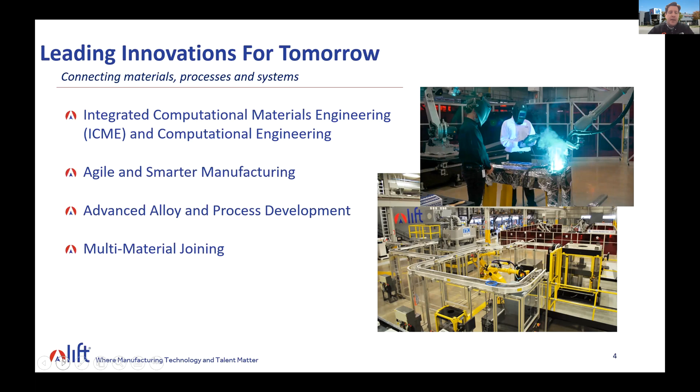We want to make sure that we can get these new technologies, new innovations in the hands of the warfighter, in the hands of industry to commercialize as quickly as possible. So we're glad to have Solvus Global here today talking about that transition.

You see a little bit more in depth about those pillars of technology here. I won't quiz you on these, but if you have questions, please don't hesitate to reach out to us directly. We'd be happy to talk to you and connect you to our technology team to see how we might help your organization move forward with any of these technologies.

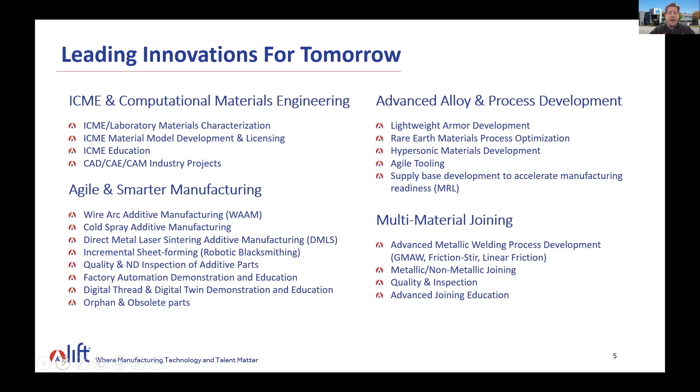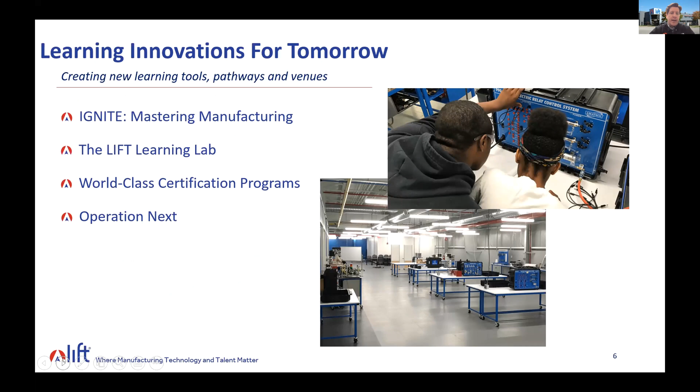A little bit on the talent side of the equation. Again, still here about innovation, but now we're talking about new learning tools, new pathways, new venues, and we really cover the students' continuum through their education pathway, starting with our Ignite Mastering Manufacturing curriculum.

This is a high school curriculum, a foundational curriculum for high school students, introducing them to advanced manufacturing and driving them towards possibly becoming the next generation of multi-skilled technicians. We run that curriculum out of our LIFT Learning Lab that is in our Detroit facility.

It's not solely at the Learning Lab, though. It is available in 10 states around the country. About 3,500 students are currently participating in our Ignite curriculum, but we tested it out and ran it first in our LIFT Learning Lab.

You see the Learning Lab there is really made of 7 different labs. Along with the high school curriculum at their Learning Lab, we also offer certification courses and certification opportunities for more mature adult learners.

Those are running and are LIFT certified programs that we run through LIFT. And then we also have our Operation Next program, which offers the same four majors, if you will, but those are geared towards our active duty service members and members of the National Guard and Reserve. So we are proud to help those folks transition into their next career, their civilian career, help them earn a certification while they're on active duty or serving the Guard and Reserve, free of charge to them.

That is available in Fort Campbell, Kentucky. It is available to the National Guard and Reserve in Michigan, Wisconsin, Florida, New York, Alabama. It's also available to the Hampton Roads region of Virginia. So we're very proud of that program.

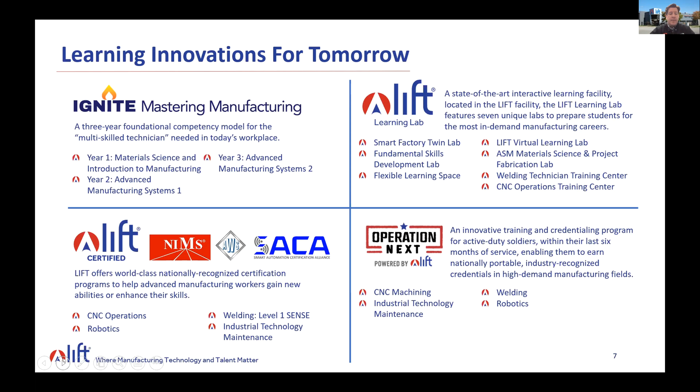I mentioned we are a nonprofit public-private partnership. We're also a membership-based organization. So I want to thank Solvus Global and their team for becoming and staying with LIFT as members. But what do you earn as becoming a LIFT member? Well, you earn all the things you see on the screen here.

We're a trusted advisor, not selling a particular product or service. We want to guide people to make that transition towards smarter manufacturing as quickly and seamlessly as we can. We're a technology accelerator, taking those technologies across the valley of death into commercialization, and folks like Solvus help us do that. We're a technology showcase, showing the art of the possible, and Sandbox, our technology team working out of our Detroit facility, showcasing the future and what is possible while sandboxing some of those technologies as well.

We're a connector and a convener, which is why everyone's here today. So thank you very much for joining us, trying to bring the best and brightest minds together. We're a talent developer, introducing high school students to advanced manufacturing, helping adult learners earn their certifications in advanced manufacturing. We want to make sure that pipeline is healthy and robust.

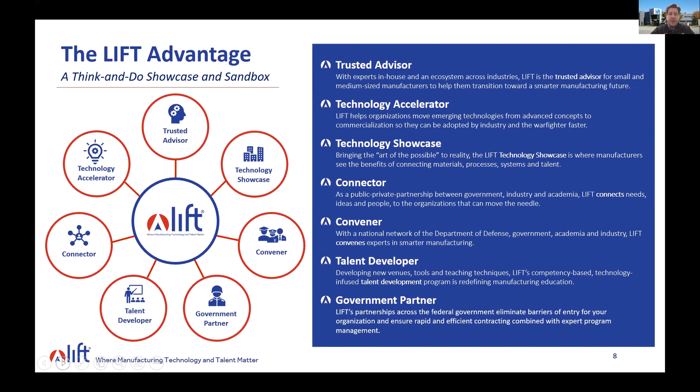And finally, we are a government partner. I mentioned we are a Department of Defense Manufacturing Innovation Institute. It is a challenge for small companies, particularly, to begin to work with the Department of Defense or the federal government. So we are happy to be that conduit and help folks start to work with the government and take those innovations to the warfighter and across to industry.

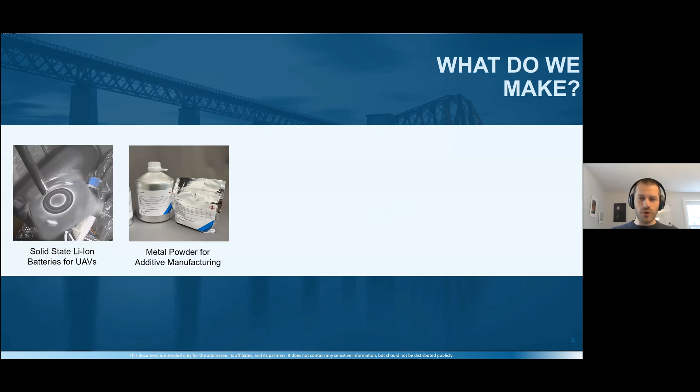So what is it that we do? What do we make? We make batteries, solid state batteries for lithium ion applications, for things like UAVs and UVs. We make metal powders and metal matrix composite powders for additive manufacturing, particularly cold spray and cold spray additive manufacturing.

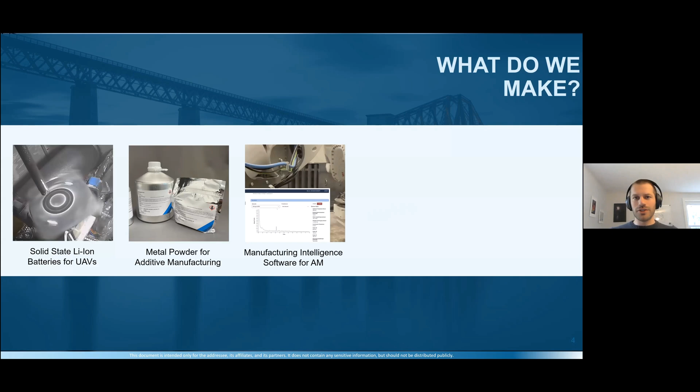We build manufacturing intelligence software. These are tools that interface with all kinds of machines and sensors and bring all that data into one data warehouse, letting you store and share that data across collaborative teams. We do a lot of work in large format casting and forging replacements using AM and related processes to robustify our supply chains. And lastly, one of our other big focus areas is developing software tools to enhance recycling profitability.

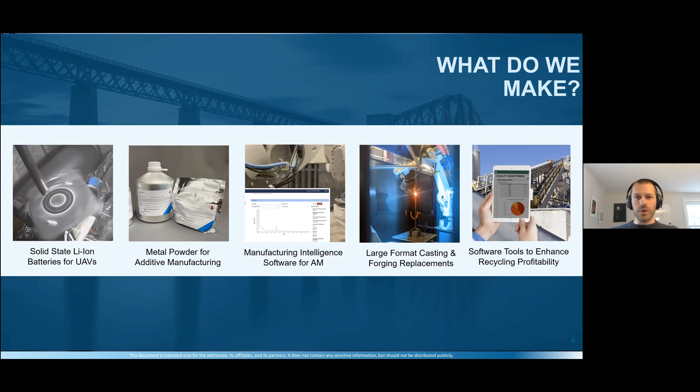I'll talk about each of these briefly in turn. We execute on the work through those different technology areas across a couple of different brands. You can see the different brands here. I won't dive too much into detail, but Powders on Demand is obviously focused on AM powders, and our big business unit is focused on large format AM, particularly metal.

So again, we've got five technology areas across these different brands, and that's what we do to help deploy these solutions out into industry. I'll touch on some technology pieces here that'll be fun to talk about, and we can dive deeper if there's any specific questions anybody has.

We are located in central Massachusetts. We have three different facilities: Worcester, Leominster, and a shared space with VRC Metal Systems down in Webster, Massachusetts. So we've got quite a bit of production space. We just moved into this space last June, and it's about 70% programmed out already. We're really excited to be scaling up a number of our operations.

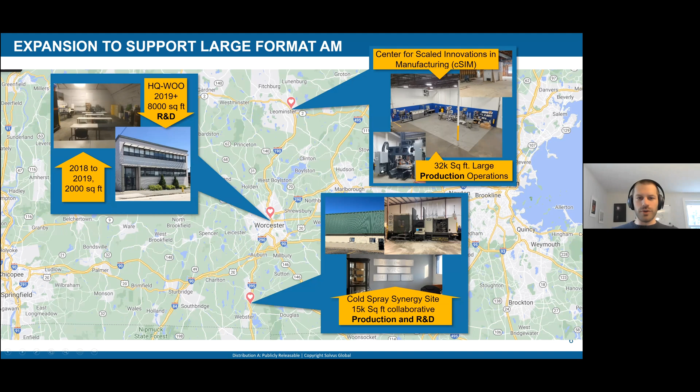We're a relatively young company, relatively small, but growing pretty quickly, and we're excited to share some of what we're doing as part of these scaled up operations. So I want to start by talking about powders for cold spray, additive manufacturing, and beyond.

A key part of what we do is really focus on designing materials that optimally perform in a given process. A great example is our SAAM aluminum 6061. You can take an aluminum 6061 powder off the shelf anywhere and run it through a cold spray process. If you're not familiar with cold spray, metal powders are injected into a high pressure, high temperature gas stream and shot through a supersonic rocket nozzle. They travel really fast, hit onto a surface, deform, and stick.

In an as-received condition, you're going to have a really brittle product. It might be fully dense, it might have great corrosion properties, but it's not going to have great mechanical structural properties. So what we do is engineer that powder — we change things like the surface, the morphology, the microstructure, and optimize it for a specific process, not even just the process in general.

Cold spray encompasses a lot of different technologies, but specific to the process performance that you can get with something like helium versus nitrogen, high pressure cold spray versus low pressure cold spray, we tackle all of those different areas, and we make sure that the powders that we produce can directly perform in the process that you're going to use.

So the example here for aluminum 6061, you get a brittle product in the as received condition. When you use our product, which is a modified 6061, you're going to get near structural, near wrought type properties. So the idea here is that across all the materials that we offer, you can hit these types of performance metrics in your as-built state, or with minimal post-processing. Essentially, we optimize our materials so that they work in the best way possible in your manufacturing process, and we guarantee that type of quality and control.

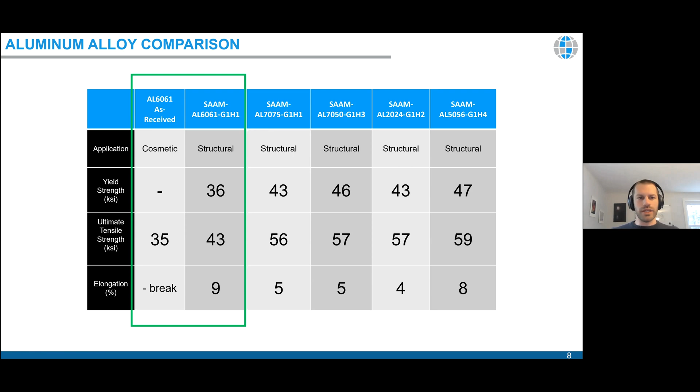Another key piece of this is our ability to really quickly innovate and evaluate different materials. We understand at a physics-based level what's going on in the material systems during these types of processes, whether it's laser-based or kinetic-based, doesn't really matter. So we develop and deploy a number of different both evaluation and quality assurance tools to monitor these materials.

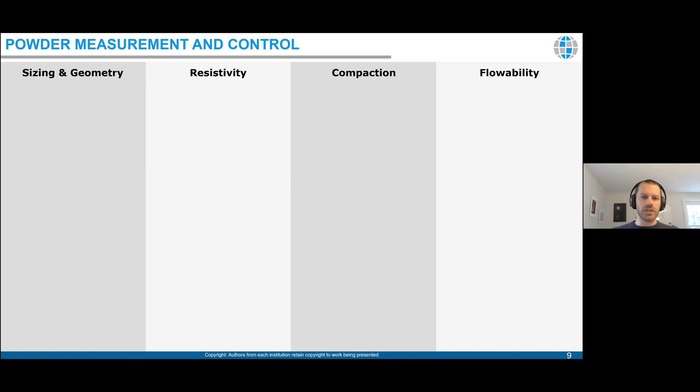The reason that matters is that for a long time, we haven't thought enough about what really goes into a powder, what really makes it work and function. So we look at things like size and geometry. We have a number of different techniques, a number of different attributes that we monitor here, from morphology, size, surface area, and all of that kind of fun stuff.

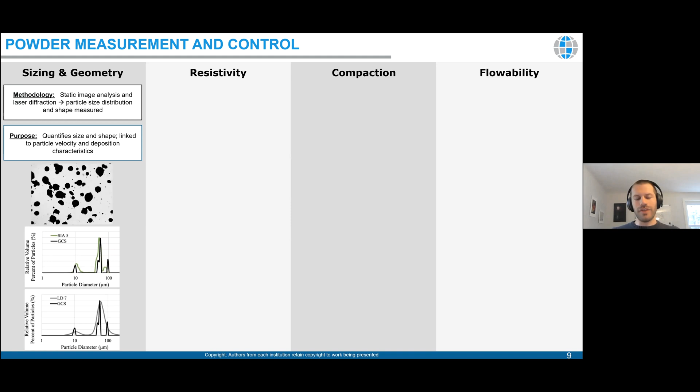Electrical resistivity of the material. This tells you a lot about the surface characteristics, microstructural characteristics, as well as some information about your size and sliding characteristics of the powder material.

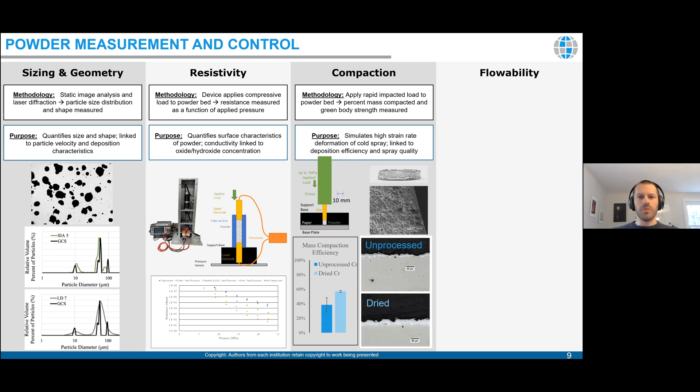We look at something called compaction. This is a high impact strain evaluation designed to evaluate the differences between the mechanical aspects of different materials. So you can see here an example of an unprocessed and a dried chromium powder. You get significant improved performance in the dried material, and we're able to evaluate that through our impact scenarios.

And then lastly here, flowability. There's a number of different flowability techniques that are out there in industry, whether you've got Carney, you've got Hall, you've got flow block, rotary drums, lots of different techniques. The important part is that you understand in your given process, how is that powder actually moving, how is it actually flowing? So we take great pride in evaluating the flow characteristics of the powder material related to the process.

So that gives you an evaluation in the kind of laboratory - how is this material going to perform in the actual deposition process, whatever that process may be. So we've deployed a number of these across quality assurance, as well as material evaluation, screening, and development. So again, we can get to the ultimate goal of providing the right materials for a given process so that you get the performance targets that you need right out of the gate.

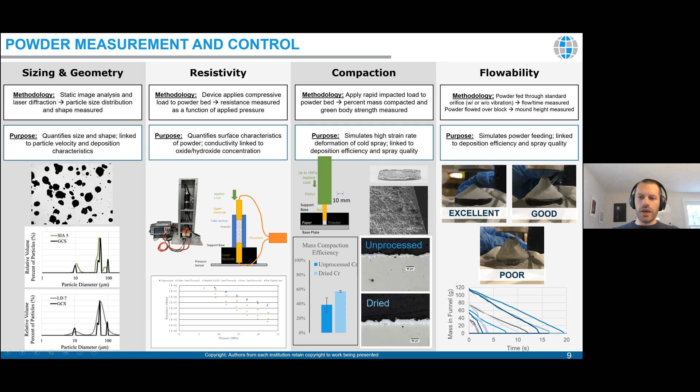We have a number of different capabilities in the background for doing that. Everything from sizing operations to surface modification operations, microstructural, mechanical modifications. It ranges the gambit. And really, it's a number of different capabilities that we deploy, as well as we deploy through our partners. So if we don't have the capability in-house, we have folks who can get it. If we don't have the material off the shelf, we have partners that we can work with to get you that material. So we can essentially be your one-stop shop for any process-specific powder material that you might be looking for.

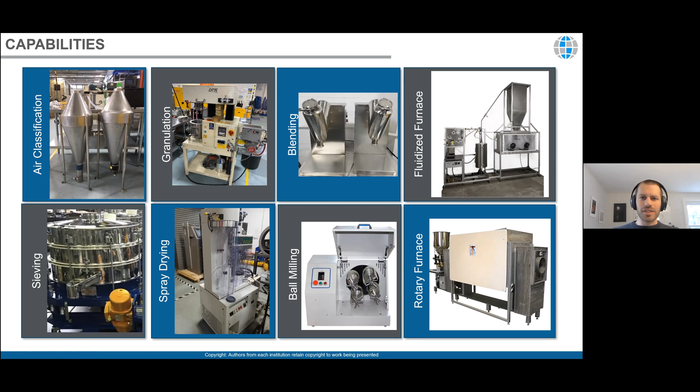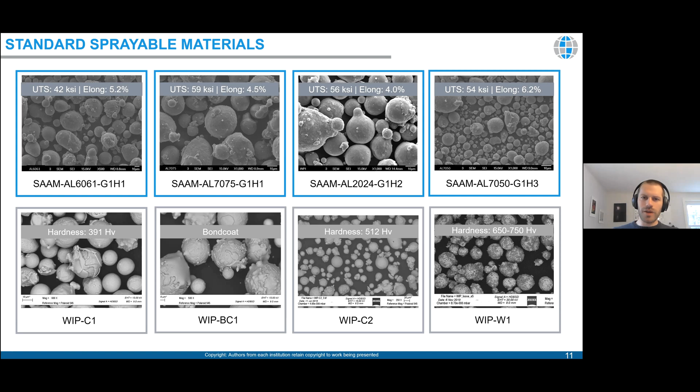We've got a few others that are coming down the pipeline here. So you've got things like silver, we've got a high nickel superalloy-based material, titanium, as well as some newer hard-facing materials, this WIP W2 designed to be sprayed in nitrogen applications. We've got some copper-coated tungsten, very good for electronics and kind of radiation protection. Some unique stainless steels that are coming out, designed for really high deposition efficiency in a nitrogen spray environment.

If you're not familiar with nitrogen versus helium spray, nitrogen is great for low-cost applications, while helium is great for high-cost applications. So you can leverage those depending on your target performance requirements.

We're working on some nitrogen sprayable aluminum products, as well as some different metal matrix composite materials for really high corrosion resistant applications. There's a bunch more coming down the pipeline, including refractory-based materials, some other alternative functional materials, and additional corrosion resistant materials.

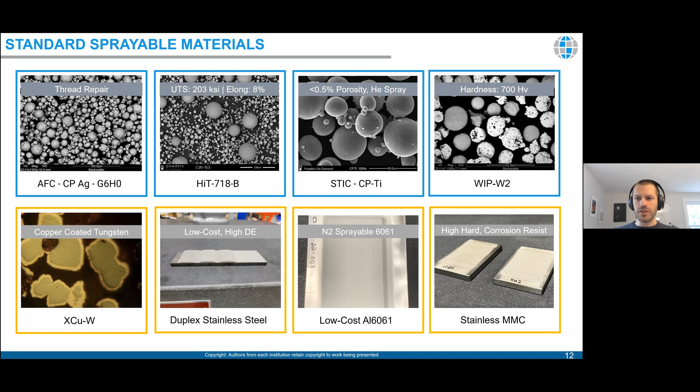So if there's a material you're looking for in your specific application, let us know. If we don't have it, we probably have it in our development queue. If it's not in our development queue and it's a high enough need, we'll roll it out for you. We're here to ultimately serve our customers and serve the need base of the user community here.

When we talk about the powder materials, in particular for cold spray additive type applications, the key here is that we're property first. We're not just selling a product for the sake of selling it. We're really focused on making sure that the materials will meet your need, will meet the demands of your application. And so we put all that front and center.

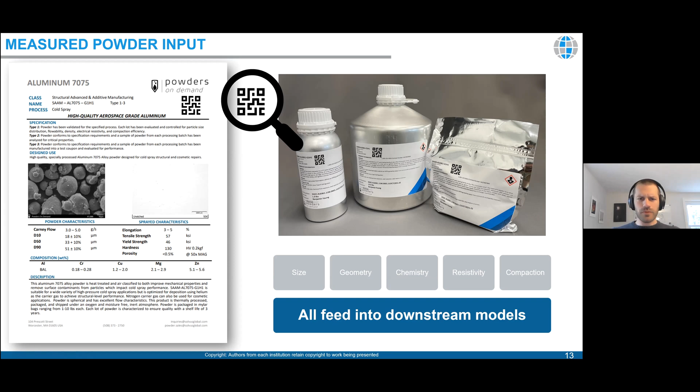We put it on a little QR code here so you can get access to all the materials, all of the information that you need to both qualify and assure your material, as well as select the right material for your specific application.

When we look at this over a number of years, we design our materials to be fully inertly packaged, to be able to sit on the shelf for many, many years, and to be able to be used right out of that package.

The packaging has actually been modified since we first came out with some of these designs, but we've got a great example here of over the course of 4 years, an aluminum 6061 that we had processed that really, after that period of time, hasn't seen any degradation in material performance.

That's because of the care that we take in processing the material, removing moisture, removing oxygen, packaging the material, so it can sit there and be ready to go when you need it, whether it's point of need type manufacturing out in the field, or in the shop when you just haven't gotten to use that material in a while.

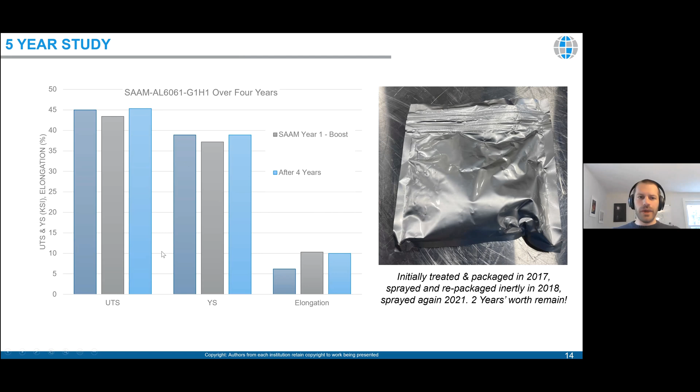We offer a variety of different packaging solutions. Again, it depends on the product and what you're looking for, but everything from those bags you saw a second ago to kind of forward operating type secure material transportation. It could be a Pelican case, or some other secure vessel, but powder-based materials that are ruggedized so they can go into a variety of different applications forward and beyond.

So that's everything I'll talk about today on powders. Again, I'm not diving into applications there. We've got material properties. If you want to talk applications, happy to jump in there offline.

I want to switch gears a little bit to some of the data management activities. For this, we'll talk about really a single product focus here around the Apex platform that I talked about a moment ago.

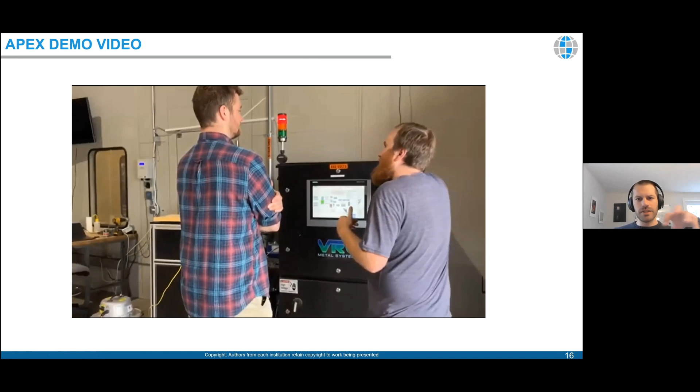This is really built out. It's out in testing in a number of different sites right now, in collaboration with the US Army, US Navy, and VRC Metal Systems.

What this is, basically, is a tool that pulls together all kinds of different data streams from the manufacturing cell. So this could be a cold spray system, this could be a wire arc additive manufacturing system, or it could be any other manufacturing cell.

It manages all of your different consumables, all of your different wearing components, stores and tracks those, and actually adds some intelligence in the background. So if you're using a worn out component, or a component that's maybe incompatible with something else, the system will flag it and recognize it for you.

It offers full organizational management, so we can get in there and work with a number of different organizations distributed across a bunch of different geographies. This can be cloud-based or local, just depending on your specific security and data sharing needs. You can get in here and really customize this depending on your specific application.

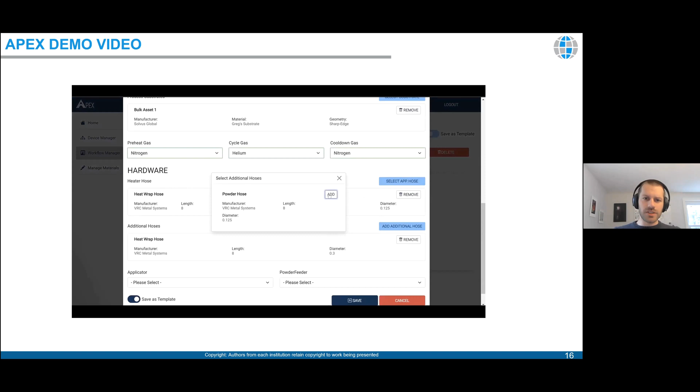Again, everything here is really teed up for a cold spray specific type application, but there's a wide range of systems and sensors that we can interface with. All of these allow for streamlined, seamless data management, data sharing, and data storage.

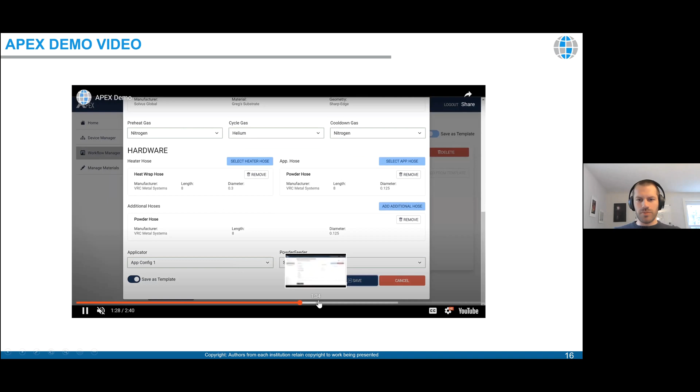So I can skip you through here to the process for a second, just to give you a sense of it. There's some intelligence added in here in the background. Basically, we've taken all of the processing conditions that we're operating at.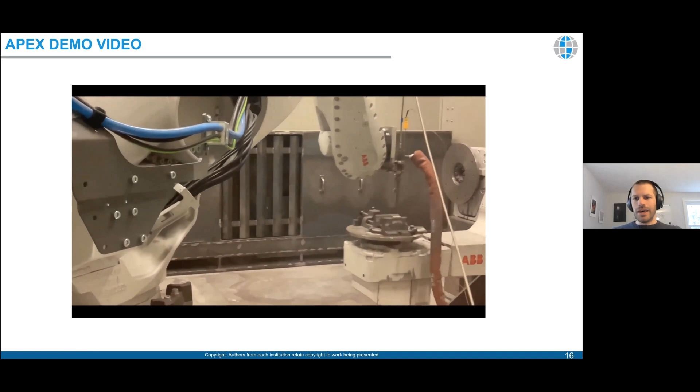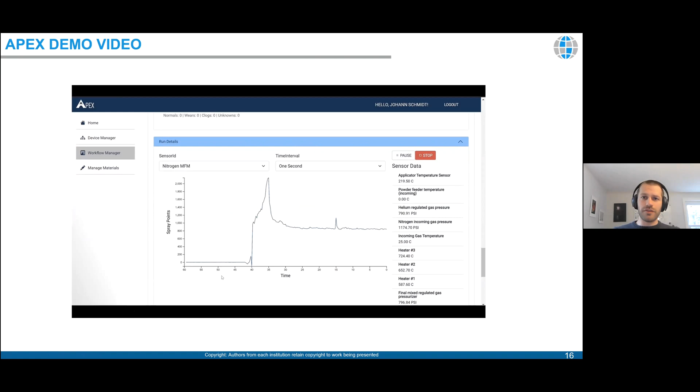There's actually a model built in here to recommend whether or not the materials you're using are compatible with one another. And you can see a really simple operation with the process monitoring, flagging through different sensors, whether they're on board with a PLC or off board in a separate profilometry or thermal camera based system. You can see the types of data we're able to capture, and again, all of that is stored in the background for whatever purpose you want, sharing or otherwise.

The idea here is that it interfaces with a wide range of different material systems and capabilities. So the kind of back engine of this, in terms of some of the models and intelligence we can insert in here, is pretty neat.

In this case, we have a nozzle clogging, fouling, or wearing recommendation engine. If you're not familiar with that specific issue in cold spray, sometimes certain materials flowing through that nozzle I described earlier aren't compatible with one another. Maybe it's a hard material through a soft nozzle, so you start to wear away at that nozzle. Maybe it's a really sticky material through a hard carbide-based nozzle that tends to clog or foul.

So essentially what we've done is gone through and broken out all of the different material components of a nozzle and of a powder, looked at a bunch of different experimental data, and put together this machine learning based recommendation engine that learns as you generate more data inside of your processing map.

It basically looks at all the different conditions - your temperature, your pressure, the materials you're using, the specific nozzle you're using, not just the type but the actual nozzle identifier - and evaluates whether or not those materials are compatible. It recommends, hey, maybe you should change your nozzle, maybe it's going to wear out over the course of this 2-3 hour spray operation because that nozzle's been heavily used, and makes those recommendations right in the platform.

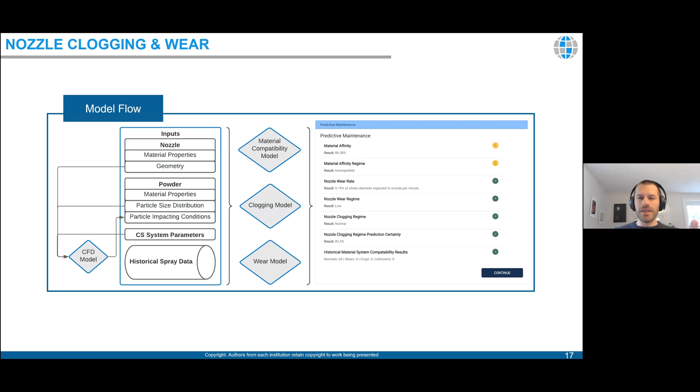So in this case, you can see some of the types of powder properties brought into play, some of the specific nozzle history, operating conditions, again across this example of VRC Gen 3, and then the outcome. This is basically a map of a bunch of different materials that have been sprayed in combination, and the system is looking at this process map and saying, okay, where does this new data point fall that I'm going to be spraying?

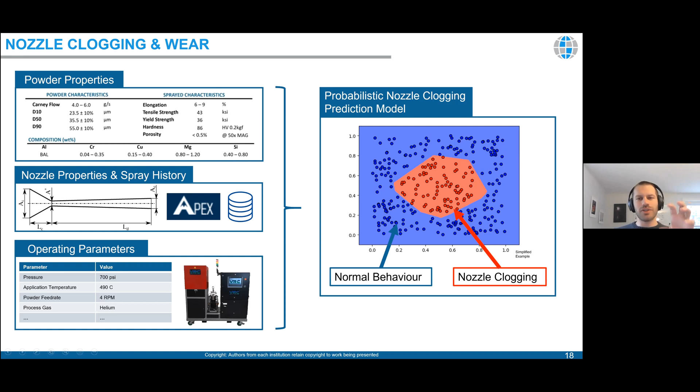Is it going to be in this normal operation window, the blue space, or is it going to be more in that red zone where we have concerns over clogging occurring? So that's where you get a recommendation engine we've built out specific to the cold spray process here. There's some other activities we've done.

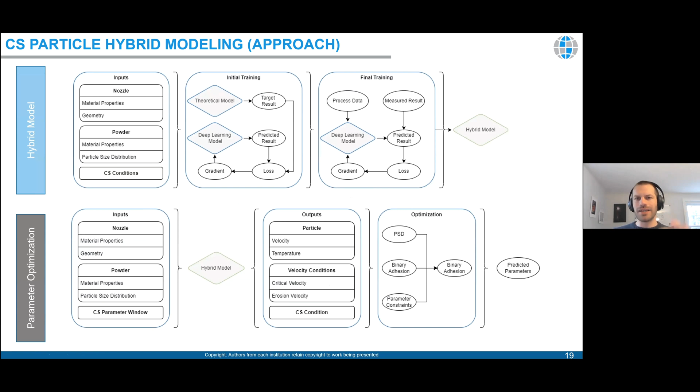I'll skip through this fairly quickly for the sake of time, but basically looking at hybridizing predictive models for cold spray, specifically looking at velocity calculations. This is more of a research and development effort, but if anybody's interested in collaborating in this type of space, we do quite a bit of taking physics-based models, hybridizing them, and putting them into an environment where you can use them as tools, as resources for quick process evaluation, optimization, things like that.

So this is just an example where you could take a fairly standard physics-based model. You could program it out in MATLAB or your other programming language of choice, and running that operation might take you a few hundred seconds. You can really get in and tune that up, and it's still going to take on the order of 10 to 15 seconds to run an operation.

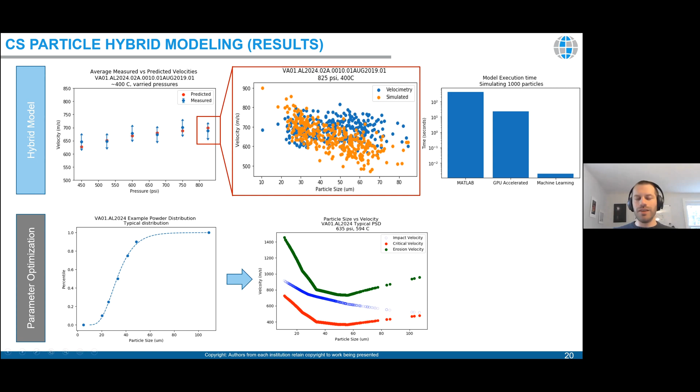When you hybridize it the way that we do, using different neural network configurations, we can get that calculation time down into fractions of seconds. And that allows you to run iterative optimization models. It really kind of takes the best of both worlds - your data-based processing combines with physics-based processing and lets you do high throughput computation with relatively minimal effort. So if anybody wants to chat about that, happy to dive in deeper there.

I did want to dive into some of the large format additive manufacturing operations we have going on. The basic premise of this, I'll borrow from Dr. Aaron Wiest - I think he's transitioned roles since his shipbuilding industrial base task force days, but he's still working in this space. He really identified a major need in the Navy supply chain specifically, but this applies to all supply chains in the US for casting and forging gaps, long lead times, materials that aren't available, and overseas manufacturing that's just not available today with all the supply chain challenges across the globe.

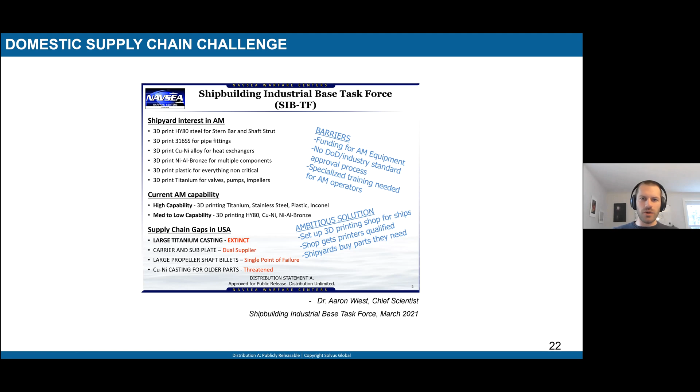So we took this challenge to heart and said, okay, what can we do to help step into this space? Our primary focus is really on metal-based large format 3D printing, where we're not looking at high resolution builds - we're talking about large parts, many feet by many feet on a side. And we're focused really on material performance first and foremost.

A great example, obviously near and dear to the Navy's heart, is titanium. We've developed a wire arc additive manufacturing procedure, working to qualify with NAVSEA under their new ArcDED Tech Pub, to produce WAAM titanium parts for the Navy. The reason for this is that these are the types of parts that have very low availability out there in the industry today - supply chain challenges, either very, very long lead times or no quotes.

With the wire arc additive process, we've designed and built our own inert enclosures. We've qualified these materials - they meet and exceed all casting requirements. You can see down here at the right, very consistent build operations. And what that allows us to do is basically have an alternative to cast titanium parts.

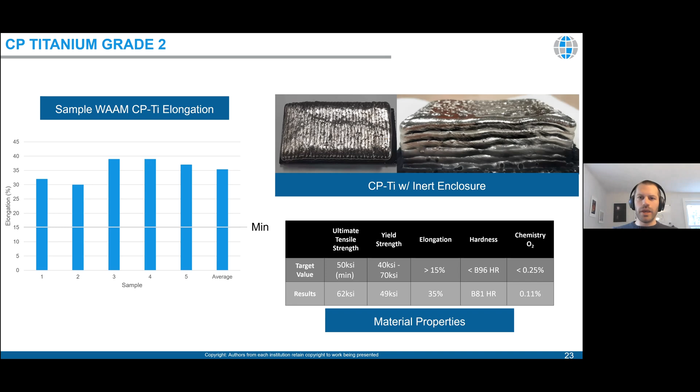These are non-structural - so we're talking cast here - but they're able to serve as a supply chain remediation, in particular for these types of components that are no longer available in the supply chain, or we've got ships or aircraft sitting in dry dock or on the ground, not in operation, because they don't have parts. Additive manufacturing can come in here and remediate that challenge. I'm not talking about any specific parts here because it's a public forum, but you get the idea in terms of the material properties and performance we can get out of this.

Looking at a few other technology areas we focus on: cold spray additive manufacturing is a big one for us. We talked about some of our aluminum 6061, some of our nickel-based superalloys that we've developed. We've also got a number of different copper and refractory-based materials coming into play now for additive manufacturing purposes, as well as combination approaches - AM with cold spray, combined with surface modification based on maybe a wear-resistant material. All of that's kind of within the wheelhouse these days.

Across the wire arc additives, we talked about titanium. We also have a huge focus on high-strength steels and 4000 series replacements - we're getting well in the neighborhood of target applications for replacing things like your 4340, 4140 steels using, again, a wire arc process. And then a big lift in the nickel superalloys on the wire arc additive side of things.

These are used in a number of different applications, from obviously turbine applications to activities with PEO Soldier that we're developing some unique solutions for. These are, again, high strength materials, designed property first, focused on performance-based applications.

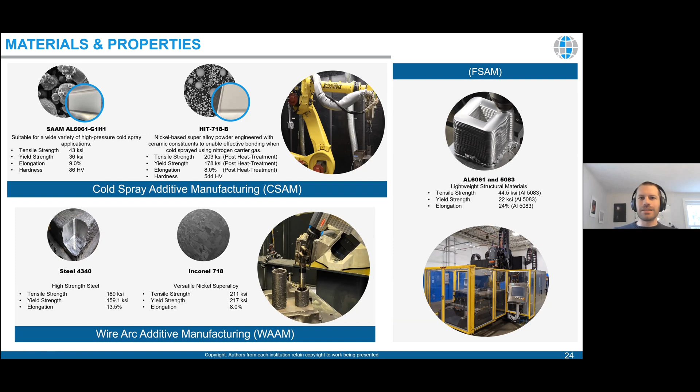And then lastly, over here on the right, a relatively new area for us compared to the others - this is friction stir additive manufacturing. We primarily focus on 6000, 5000, 7000 series aluminum alloys. These are a lot of development activities - we're looking at the same kind of idea, but now focused more on forging replacements, so getting wrought-like properties right out of the gate with friction stir additive. I'll show you a video of that here in a second, but this just gives you an idea of some of the different materials and capabilities we're looking at as solutions for this large format casting and forging replacement in the domestic supply chain here.

A few of the different systems that we have coming in, or are already coming in: a number of different wire arc additive cells, and a number of different cold spray additive cells, both large format and more traditional.

We've got a fairly large wire arc additive machining and heat treating line coming in. We're pretty excited about this. It's going to be a fully integrated line for going from a wire arc additive cell, doing your heat treatment, putting it in your machining center to run your finished machining operations, and get it right back out the door. This is actually in collaboration with the state of Massachusetts through the Mass Tech Collaborative Program, and it will be landing on our floor around October of this year.

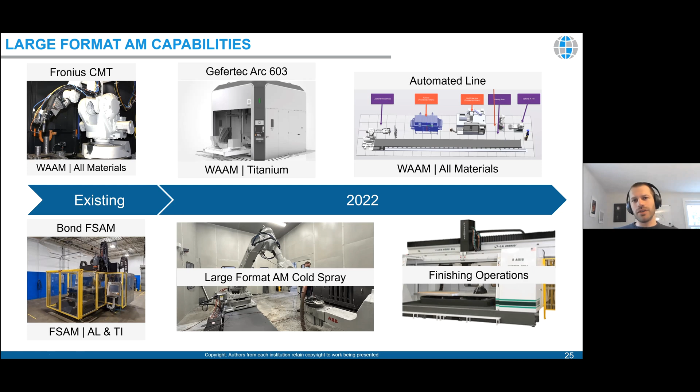So this is all getting to the idea that we'll be a one-stop shop for building your casting and forging replacement parts using additive manufacturing. Again, we're not particular to any one process. What we look at is what's the best process to hit your specific performance requirements, as well as your cost and lead time requirements. All of those things are what drive our selection. It doesn't matter whether you want to use WAAM, friction stir, or cold spray — what's best for your application is what we'll help you get to. The idea is that we can do all of this in-house, which minimizes fuel consumption and transportation, eliminates a lot of the headache in your lead times, and eliminates some of the risk you have when working with a lot of different vendors. We're here as kind of one stop for all of your different needs in the AM production cycle.

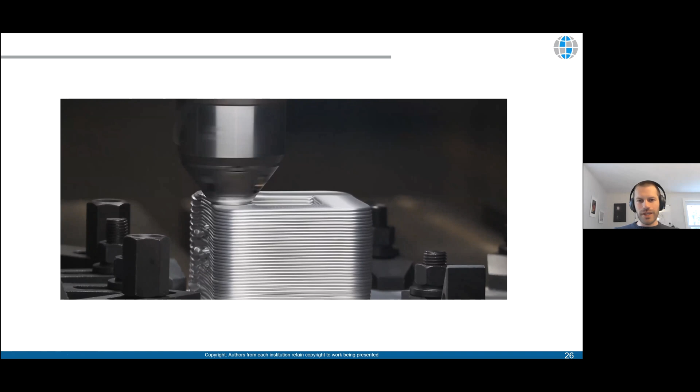So just to give you a little flavor for what the friction stir additive system we have is capable of doing — this is an aluminum 6061 build. This is a system designed and built by Bond Technologies out in Indiana. You can see it's got an initial warm-up period there, and then we're depositing a layer. These are pretty thick layers, anywhere from about 1/8 of an inch to 1/4 of an inch, really high fidelity in terms of what we're able to deposit here.

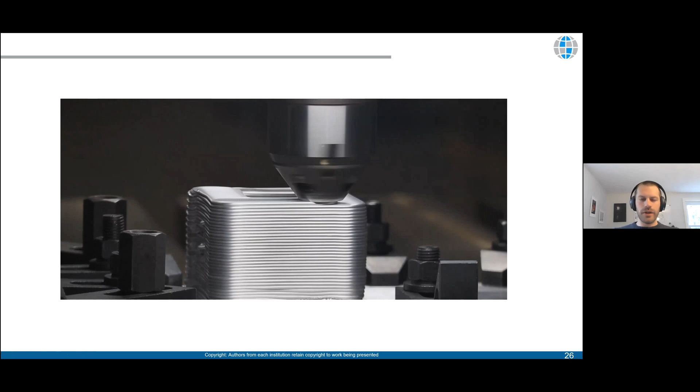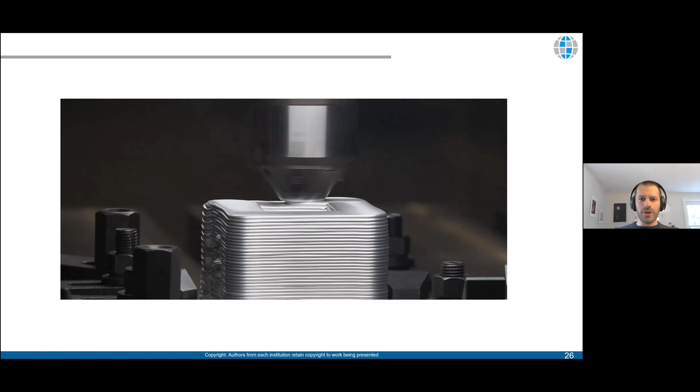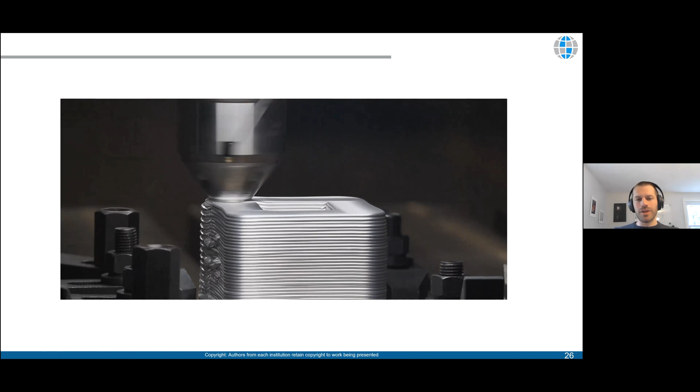Really unique machine — we've got load measurement capability on all of our axes, torque monitoring, temperature monitoring, and all kinds of hookups here. This was a system designed in collaboration with the Army Research Laboratory, so it's capable of doing in-process machining as well. It has all the right sensor IOs and outputs so we can hook up essentially any sensor suite onto this that we want, to monitor all the various aspects of the build, whether it's load, speed, or temperature. It's all built into that platform. We've got cooling capabilities, and we can integrate other processes with this unit.

So this is a little bit more on the research side, but it is scaled up and designed to do large format parts — many feet by many feet. We're working with a number of different partners and collaborators across the supply chain who are excited about having these types of capabilities, to get wrought-like properties in an AM process right out of the gate. If anybody's interested in collaborating in this space, we're always looking for other partners to scale this technology. I think I saw some of our partners from Bond on the webinar here as well, so if you have any specific questions, I'm more than happy to answer them.

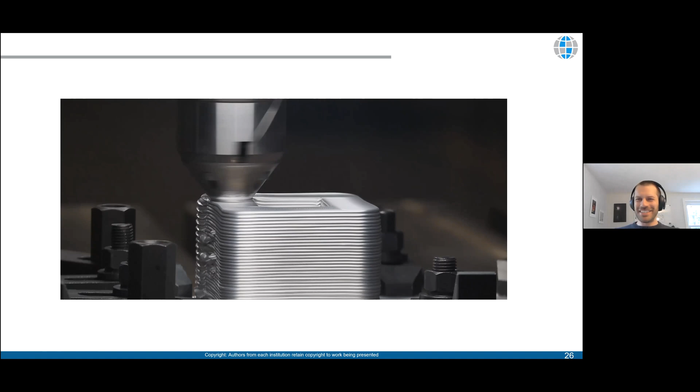The last thing I'll highlight is some unique things we're doing in the background in the world of large scale additive. Multi-material systems are a lot of fun — specifically looking at wire arc additive, combining a high strength cobalt-based material like Stellite with a high temperature nickel-based superalloy like Inconel. We take these two materials so you can have the high strength and high wear resistance of the Stellite in combination with the high temperature, high strength applications of the Inconel. So you've got a material that performs very well at high temperatures, and another that handles high wear operations. Combine those two materials together, and now you can have essentially a hard chrome replacement scenario. That's a huge push across the DoD and a number of commercial areas as well, eliminating hard chrome due to the toxicity of hexavalent chrome specifically.

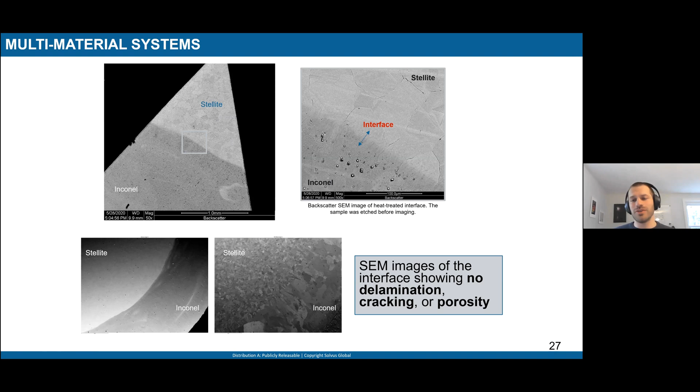So you're able to use these types of additive systems to come up with unique material combinations that can target alternative structures, alternative designs. That's one of the things we specialize in: come to us with a problem, and we'll figure out what combination of materials and processes can get you to the solution as quickly and cost effectively as possible.

Some other neat work done in collaboration with Professor Rhys Jones, out in Australia, looking at how we can take advantage of the surfaces we get out of some of these large format AM processes. Obviously that's one of the weak points of large AM—you build really fast, you get great properties, but typically your surfaces aren't suitable for using in an as-finished or as-built state.

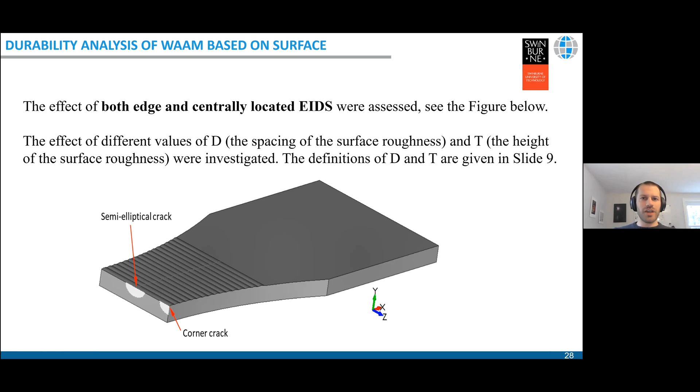So one of the things we're working with Professor Jones on is how can we optimize the surface topology of something like wire arc additive or cold spray additive so that you can use these parts in an as-built state. That starts to eliminate the lead time complexity of machining and finishing operations, and really gives you a lot of flexibility when talking about internal features and internal structures.

So what he's been doing is basically building models that simulate the surface topology. You've got kind of a sinusoidal frequency for some WAAM builds, and more different domain functions for cold spray or alternative wire arc additive builds. Essentially we're taking those, converting them to a finite element model, mapping the local stresses using an IR camera—which is really neat—and then converting that into a load type application, evaluating where it's going to fail, why it will fail, and what kind of cycle life we can assign to it.

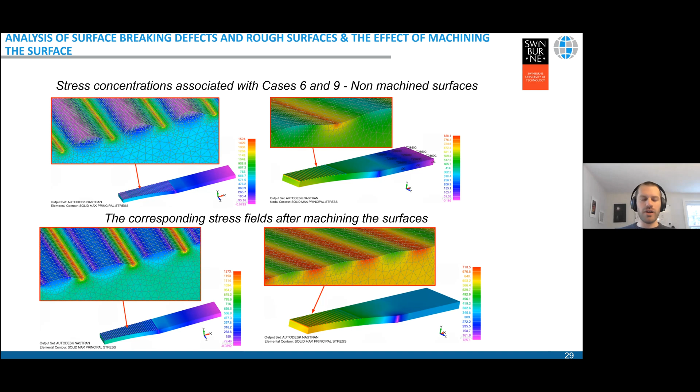We've got some really exciting papers coming out with Professor Jones showing just how durable some of these materials are coming out of the wire arc additive process after heat treatments, because of the high cooling rates you get out of WAAM. Because of some of the unique microstructures you get out of this, you wind up with really unique material properties—really high durability, really high strength. I'll make sure Joe is aware of any publications coming out of there so that if anybody's interested in that area, you can check out that work specifically.

We install thermal cameras, spectroscopy units, velocimetry for cold spray. We do load cells, temperature, acoustics—all kinds of different sensory configurations built in here, really with the goal of being able to enhance the qualification process during build.

I know that's what everybody's talking about in AM, but we really do focus on making sure we can track and monitor every aspect of our build so that by the time we're done, we have a high degree of confidence that those parts we're deploying are ready for prime time. There's minimal further testing—obviously you want to run your non-destructive testing—but essentially these parts are ready to go right off the shelf because of the in-process monitoring deployed as part of these solutions.

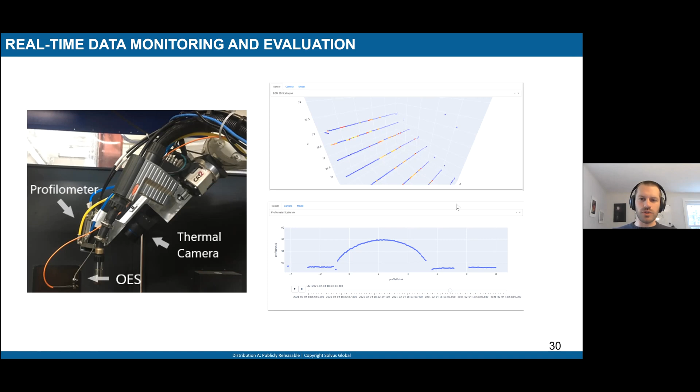So just a bit of a flavor for some of that type of activity. I know we're running close on time here, so I'll wrap things up with the last focus area for this afternoon, and that is our VALI-SORT technology stack.

If you look at the dynamics of the secondary material markets today—those are materials that have been taken from the ground as ore, processed, put into a part, and now they're going back to scrap yards. You drop them off at the local scrap collector down the street, they're sent to a scrap processor, and those processors are going to separate out the materials, sort them, and then send them back to the secondary consumers of those materials.

Well, the problem is there's a lot of variability and flexibility to the supply chain right now. There's challenges with the stability, challenges with the global supply chain of all these different materials. Formerly, we used to send a lot of our scrap overseas. We're not able to do that anymore. So there's a really critical and pivotal need in the US in particular to be able to have more reliable

supply chains of these secondary materials that can be used for high value type applications. So usually we take an aerospace grade material and we downgrade it to a cast A356 material in the case of aluminum. And that's really not where we need to be in terms of overall cost and performance going forward in the future.

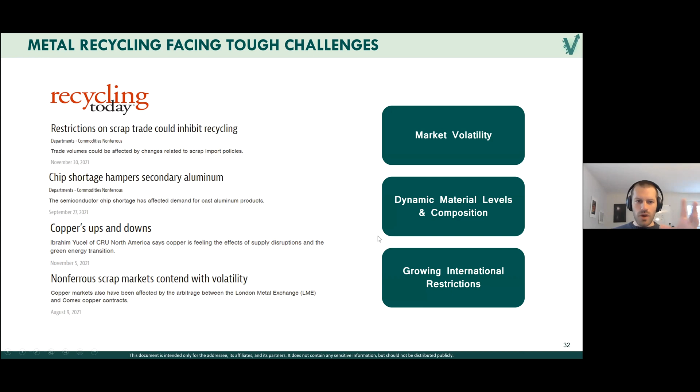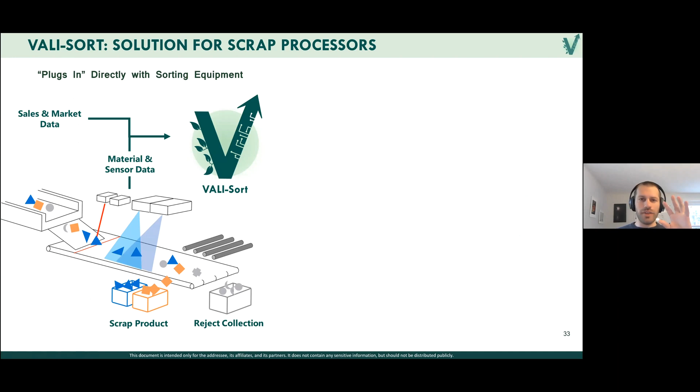And so what we've designed at Solvus through this VALI-SORT technology is essentially a software that sits and monitors the sensor-based sorting systems, looks at all the market data, commodity data, brings that all into one location, and through our proprietary software, proprietary algorithms, makes recommendations for how you should be sorting your materials. So looking at the whole scheme of everything that you could be producing with this scrap that's coming down your

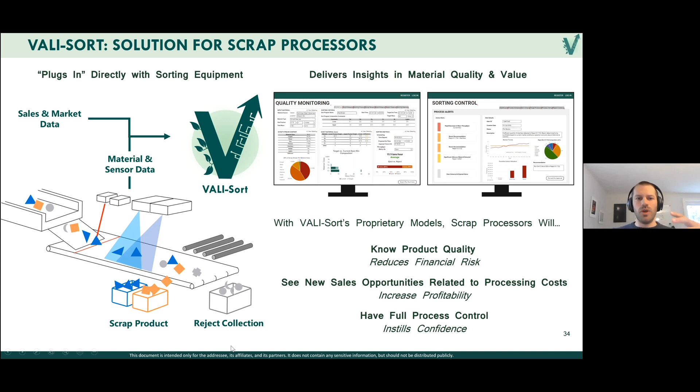line, it says, hey, based on what I see out there in industry and what's coming down your line, this is the best thing that you could sort into so that you can make the most money as a scrap processor. And what that does is it allows us to be more sustainable, and it allows us to design better alloys, better secondary alloys that have more high performing end applications. So now we can design structural alloys, we can design wrought alloys out of secondary materials. This is really the future of sustainable closed loop manufacturing in the US, and it's a critical need for us going forward.